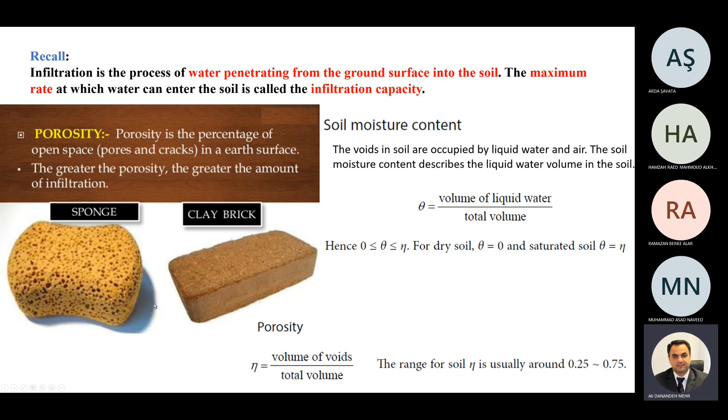After that we talked about the vadose zone, and we said that when water infiltrates into the ground from the surface, it tries to move downward to reach the saturated zone, which is called groundwater. Today we will talk about this zone.

In the previous lecture we talked about the vadose zone, and we saw that in the vadose zone we have negative pressure. We talked about the water table, which is the boundary between the vadose, or unsaturated zone, and the saturated zone.

We also talked about the capillary fringe, which is the zone where water moves upward due to the capillarity effect of tiny pipes available in the soil, like this one, from here to here. Because of the capillarity effect, a result of surface tension between soil and water, water moves upward, creating an upward fringe or region. It's a very short region, so it is called the capillary zone.

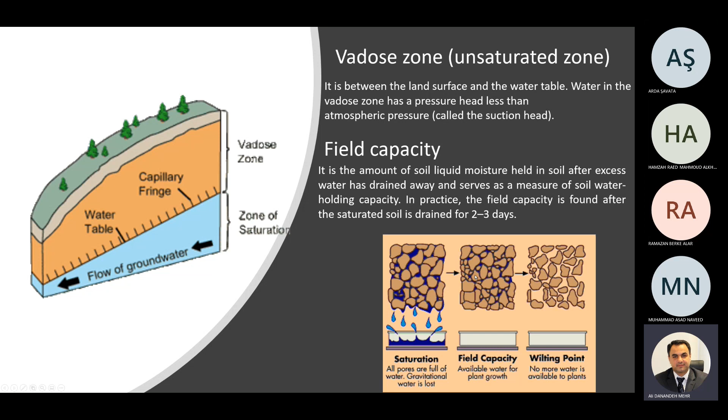Okay, so we talked about when we moved from here to here, we lost an amount of water. It is possible that we should provide some amount of water for this sample to reach this condition again, to achieve this condition again. That amount of water is called soil moisture deficit, or this represents the amount of rainfall needed. Actually, when I say we should produce water, I mean the water in nature is rainfall water, precipitation, which is necessary to return the soil to field capacity. It is called soil moisture deficit.

Deficit means shortage. Now I will talk a bit about Darcy's law, then explain it in detail.

Darcy's law is a law that we use to calculate flux of water, and also to calculate the net velocity of water in saturated soil. You see the formula is given like this. This Q is called flux, okay, this is not discharge, it is flux. Darcy flux equals K times SF.

SF actually shows head loss, this term, head loss, or it is something like slope in fluid mechanics, slope of the head loss, or let's say head loss divided by the length of the soil that water moves through, and this shows the discharge. K is a parameter called hydraulic conductivity, with units of millimeter per second.

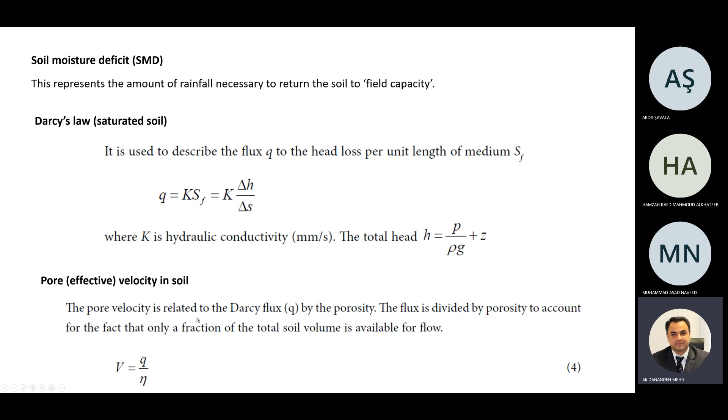Okay, definitely these are new for you, but in this lecture I will talk more about how we derive Darcy's law and what the experiment behind that formula is.

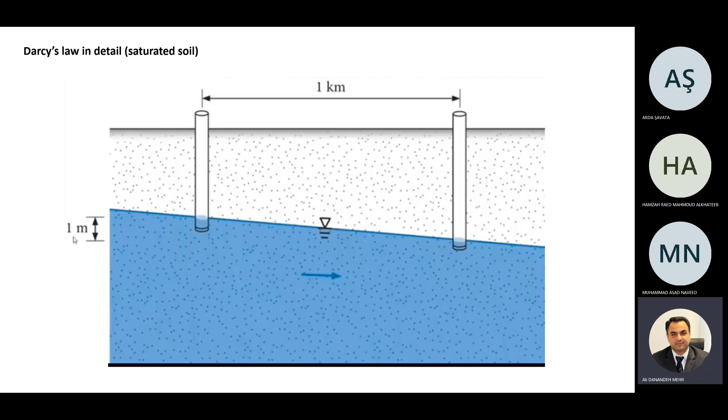Here you see Darcy's experiment. This is our groundwater layer, this is the water table, yes. Here we have the vadose zone, the unsaturated zone, and this is the saturated zone. I have two piezometers like those, or these are called wells, observation wells or piezometers, that we talked about in fluid mechanics.

The distance between the two piezometers is 1 kilometer. Here is the point that shows the water level, the water table here, maybe this is the elevation of the screen or lower part of this piezometer. And the question is,

how we can see that water moves from here to here. Actually, you see that the water elevation at this point is higher than the elevation at this point, and the difference is 1 meter. Therefore, we can say that water moves in the ground, in the saturated zone, from left to right. And the question is, what is the velocity of groundwater, or the velocity of water when it moves from here to here? We can ask this question like this.

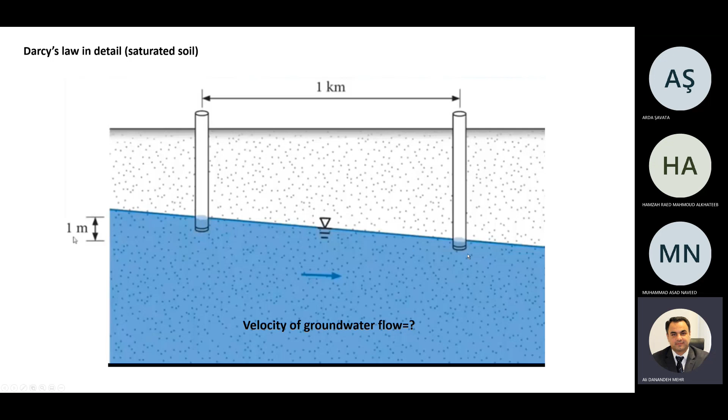For example, if one molecule of water wants to move from here to here, a distance of 1 kilometer, how many hours, days, maybe years or months should we wait for that molecule to arrive here? This question was actually answered by Darcy, and I will explain how he answered it.

But before going to the explanation of Darcy's experiment, let me ask a quick question, because we are talking about motion of liquid in soil. Yes, motion of liquid in soil. Our aim is to calculate the velocity of that motion. So my question is this: by law of nature, water flows from high to low.

Which of these multiple choices is correct? By law of nature, water flows from high to low elevation, from high to low energy, from high to low pressure, or all the above options are true. Do you have any opinion about it?

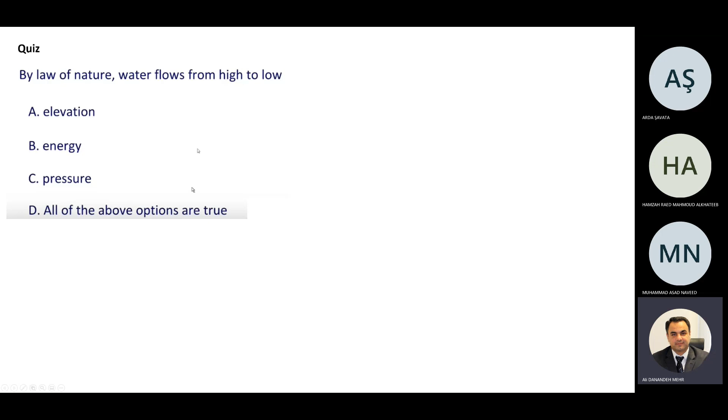Can you guess which answer is correct? I gave some explanation in previous lectures, maybe you can find the answer. If you're not sure about your choice, after this lecture you will be sure which one is true. I don't know if I should answer just now or continue, and you will find the answer during the lecture.

Let's see this experiment, done I think in Utrecht University. Here we have a model of a soil, in a laboratory, and this soil sample is under the rain. Assume this is, for example, 1 meter in height, 2 or 3 meters in length, and there are 2 ditches, or let's say streams or rivers, and some of the water moves into those. These are glasses, actually, and in nature they can be ditches or rivers. Another one is here, and from the back of this panel, they inject dye, some colorful red liquid, into the soil.

We know that after rainfall we will have infiltration. This sample could be sand. We have 2 parts of clay, and clay has low porosity, so infiltration may be impossible in that area. Therefore, by monitoring the motion of this red liquid in this sample, we can find where this red liquid goes.

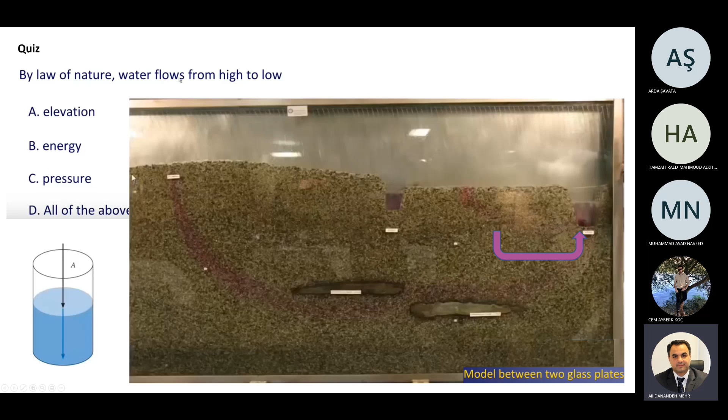energy. Therefore, in order to explain this, we can generalize this answer as energy. As energy covers elevation—you remember the Z term in the energy equation—it also covers the P over rho G pressure term. Therefore, the correct exact answer is energy. So water moves by the law of nature: water flows from high energy to low energy.

So let's come back to the definition of energy in soil and liquid. We said that this is, for example, the vadose zone, and we are looking to find the energy of the soil sample at this point. We put a piezometer here, and we see that water can move up to this elevation in the piezometer. This is called pressure head, and we also have elevation head. In soil mechanics or hydrology, the term 'head' is used, but this is just equivalent to energy—hydraulic energy. For elevation energy we say potential energy, and for pressure energy we say pressure head.

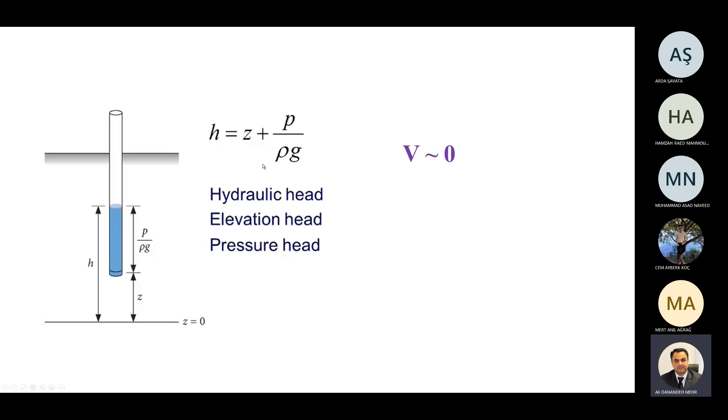And therefore the sum of these two terms is called hydraulic head. H is called hydraulic head, and it summarizes the total energy of the soil at that point. Hydraulic head equals Z plus P over rho G. Z is elevation head, P over rho G is pressure head. You remember the Bernoulli equation for total energy: Z plus V squared over 2G plus P over gamma. This term corresponds to this one.

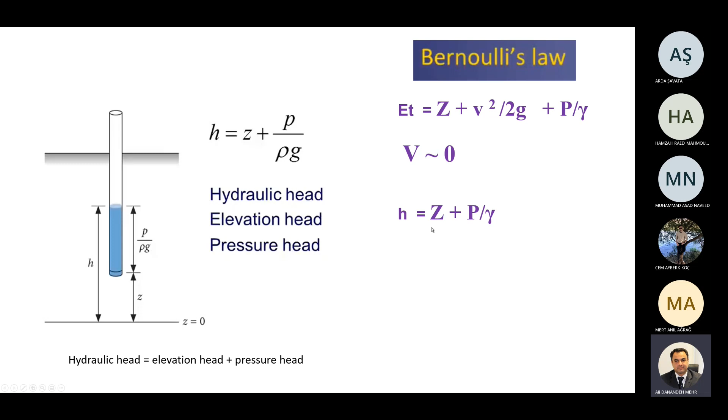And Z is the same elevation, but we don't use the kinetic energy term because velocity is negligible. Therefore we can assume V equals 0, and we can show that the total energy, which is the engine for the motion or flow of liquid in the soil, equals elevation head plus pressure head. This is called hydraulic head, equal to elevation head plus pressure head. So this information shows the energy at one point.

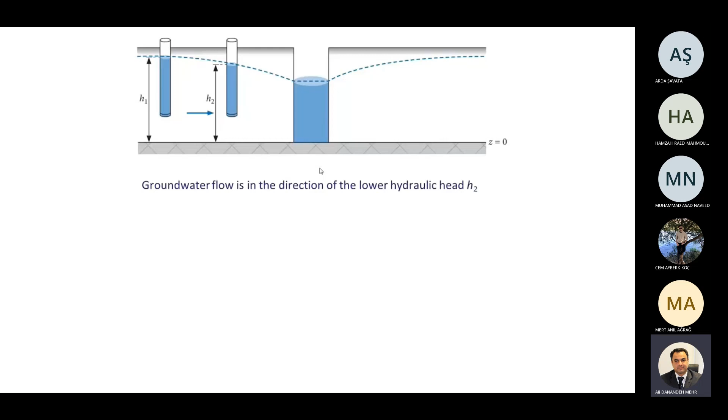But in order to calculate velocity, or answer the question of what is the velocity of motion of water from one point to another—say, 1 kilometer apart—I need to know the energy at both points. Then I can say: if the hydraulic head is higher at point 1 compared to point 2, water will move from 1 to 2, and vice versa. If the hydraulic head at point 2 is higher, water moves from the higher energy to the lower energy. Let's see which is correct.

At point 1—here is my point 1, and this is my point 2. I put a piezometer here, and I see that water comes up to here. Actually, this is the water table. When you put a piezometer in a saturated zone, the water can come up to the water table. This is why we call it an observation well—because the observation well shows the level of the water table.

So here the total hydraulic head equals Z1 plus this amount, which is equal to the pressure here over the gamma of water. At this other point, it's Z plus this value. You see that in general the hydraulic head at point 1 here is higher than the hydraulic head at point 2, which is H2. Therefore we can say that water moves from here to here.

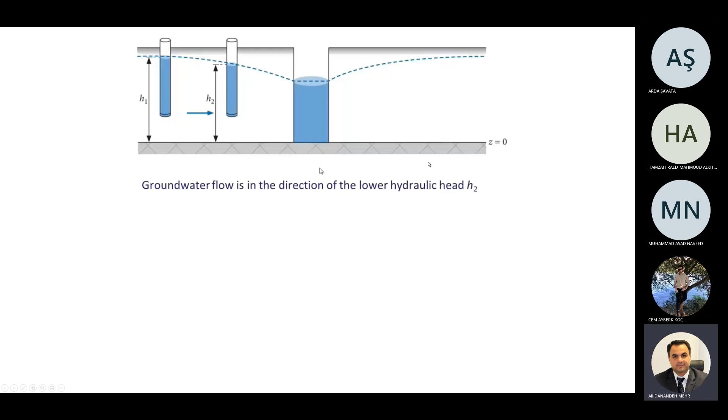So what will be the velocity? This black line here shows Z equals 0, which is our datum or reference line. So here we can say, as I told you, water moves from here to here.

And if you have a real well here, it shows that over time, if you extract water from the well—pump it out—after several days you will see the water elevation comes back to the same level. Why? Because of this motion—because of the motion of water from the surrounding zone toward the well, since when we are far from the well, this is the water table.

When we are far from the well, moving far from the well equals increasing the hydraulic head. Therefore, water always moves in this system from, for example in this part, left to right, and in that part, right to left. This shows how water moves horizontally.

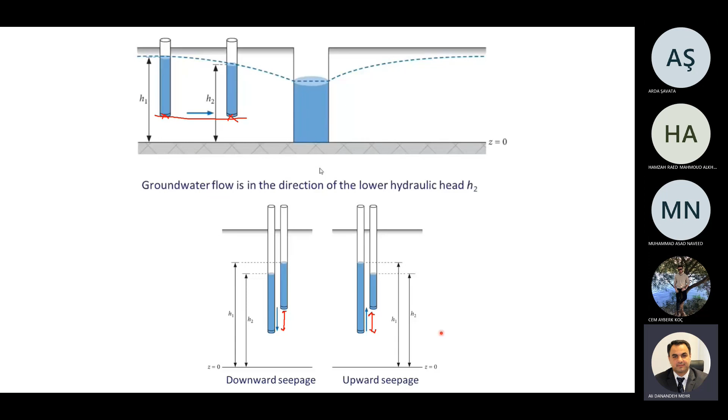So either downward or upward seepage, how can we calculate the velocity of that seepage, and also its amount? To answer this, we should review Darcy's experiment, explained here. You might have seen such an experiment in your soil mechanics course, but let's review it together.

Water moves from left to right - direction of flow is shown here - because hydraulic head here is higher than hydraulic head here. If you put a piezometer, this could show the hydraulic head at section 1. This piezometer shows hydraulic head at section 1, and this other piezometer shows hydraulic head at section 2. Hydraulic head at section 1 is H1, because from here to here is Z1, and from here to here is my P1 over gamma, the pressure head.

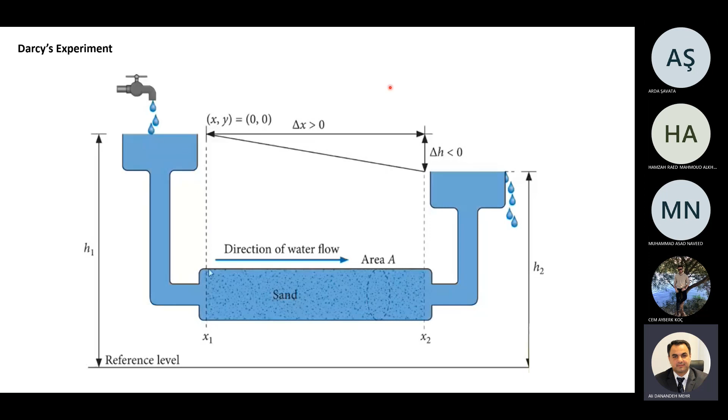Darcy said that if I increase or change the value of delta H, or if I increase the length of this piezometer, what will happen? What would happen if I enlarge the difference between hydraulic heads, by increasing H1 or increasing the length of piezometer 1? By increasing delta H, what do you think - will discharge passing the soil sample increase or not? He saw that yes, by increasing this, it will increase the discharge, and naturally it is correct.

Then what he did - he said, let me change the length of my soil sample. Instead of having such a long sample, he assumed a shorter one, meaning he decreased delta X. If I decrease delta X, what will happen? What do you think - does discharge increase or decrease? What's your opinion?

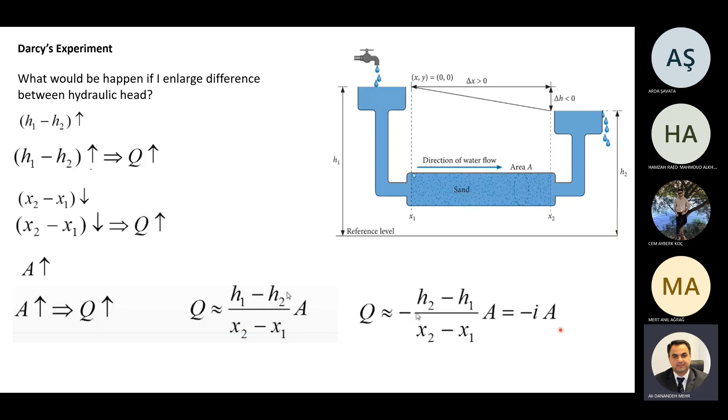You see here that this is not an equality, it's still a proportionality. To change this proportionality to equality, I have to multiply this term by a coefficient, because my equation is not dimensionally consistent or correct.

What is the dimension of Q? Cubic meter per second. But I is length over length, dimensionless, and A is square meter in SI units. Cubic meter per second equals something unitless times meter squared - therefore I need a coefficient with the right unit to have a dimensionally correct equation.

This coefficient is called hydraulic conductivity. Therefore, the discharge of liquid from X1 to X2 equals minus K, I, A - where A is this cross-sectional area.

I equals delta H over delta X. K is hydraulic conductivity. When I said A, this is total area, but as I told, water moves only from the void area, from the voids, open spaces, not through the solid materials. Therefore I should correct area to have real values, and this coefficient considers that, or shows the effect of porosity, and also some other things that we maybe do not consider.

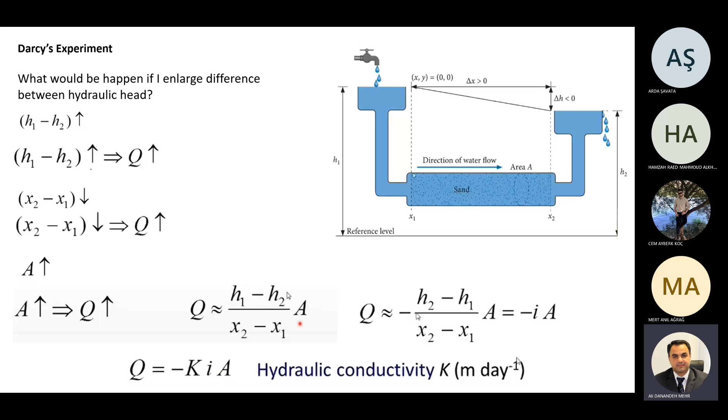So I know how to calculate discharge in a soil sample. Discharge equals minus hydraulic conductivity times I. This value, tangent of theta, shows the loss of energy, loss of head, times area of the sample. This is total Q, entire Q, and it shows the volumetric discharge.

But as I told, water does not move through the entire area, just moves through the voids. Therefore, another term called specific discharge, or volume flux density, is defined as a division of discharge or volume flux by the entire area. If we call this specific discharge, it represents the real amount of liquid that passed through the sample, through the voids, and the equation is simpler.

Specific discharge equals minus K times I. We know each term. Finally, velocity equals discharge over the area. But I already adjusted my equation based on this when I calculated net volume flux density. I adjusted it and got rid of the global area, the total area of the sample, just by dividing the specific discharge.

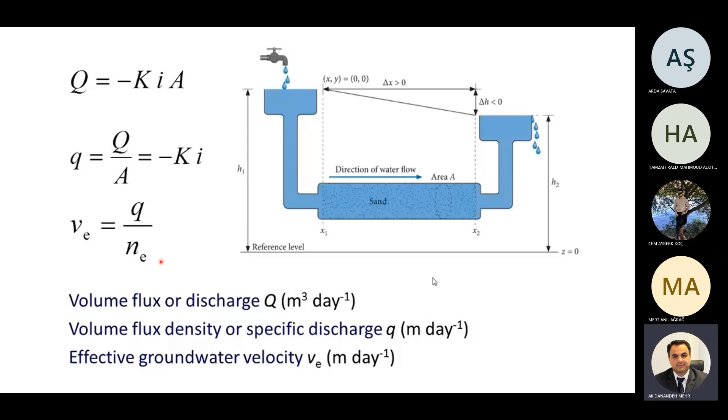We talked in the infiltration lecture about how we can measure the porosity, and then you can find effective groundwater velocity, VE.

Okay, let's come back to our question: what is the velocity of water? Remember I gave you this example - there are two monitoring wells or piezometers. Water elevation at well 1 is here, water elevation at well 2 is here. The distance is 1 kilometer, and the difference between water elevation at this point and this point equals 1 meter. So how can I find the velocity of this liquid?

Using the equations I already explained, first I'm going to calculate specific discharge. Specific discharge equals minus K times I. We assume K is 10 for this soil sample. And I, how we can calculate I, equals delta H over delta X - either from here or here you can find delta H. My delta H is 1 meter, delta X is 1000 meters, therefore I equals 10 to the power of minus 3.

Therefore discharge is 10 to the power of minus 2 meter per day, specific discharge. Again, this assumption of porosity equals 0.4 comes from the information we have about the soil in this zone. Therefore, net or effective velocity would equal 2.5 times 10 to the power of minus 2 meter per day. You see how small it is - 2.5 centimeters per day. It means that after just a day, this water molecule moves 2.5 centimeters.

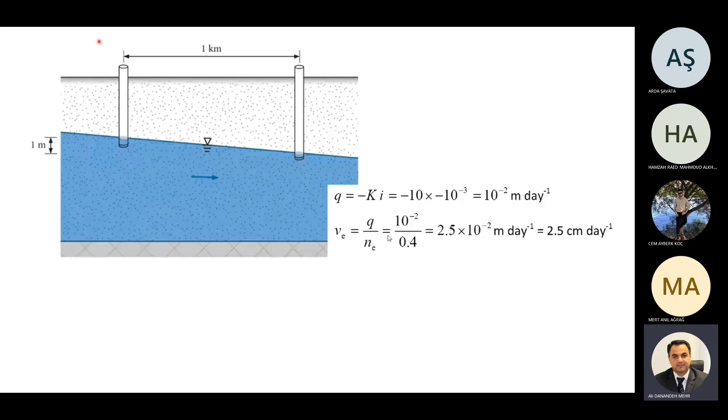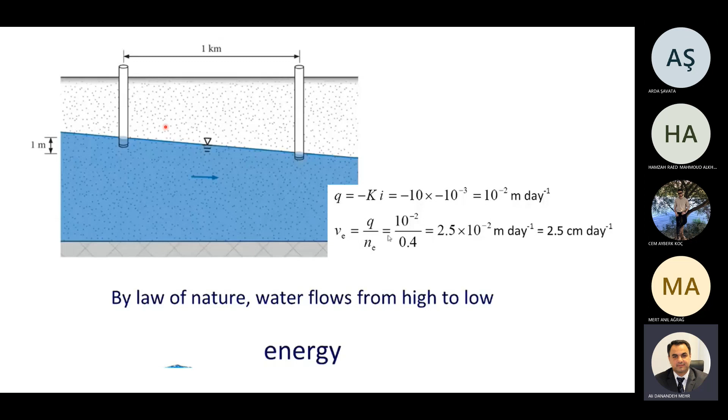So how many days, months, or years would I need for water to move from here to here, passing through this 1 kilometer of soil? This is why we say velocity is negligible in the energy equation when we consider the total energy of soil samples, and this is why we use hydraulic head - just hydraulic head - when finding the direction of motion from one point to another. We can conclude that by the law of nature, water flows from high to low energy, and this equals our hydraulic head in soil mechanics. Okay, any question?